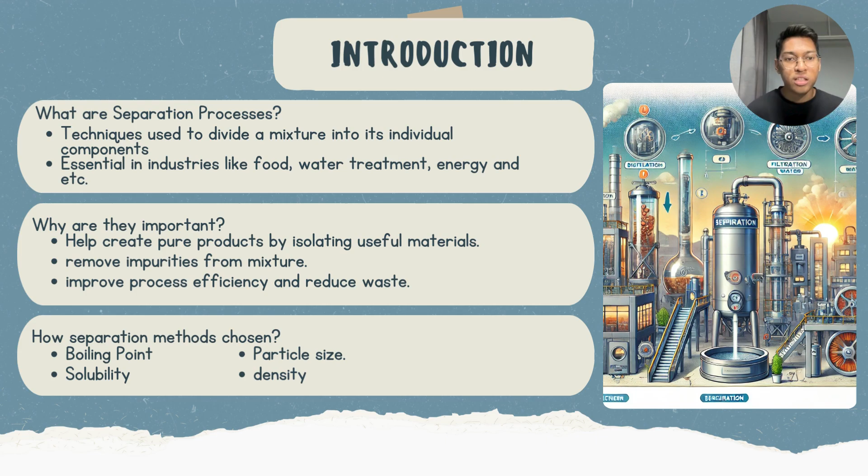So separation methods are chosen based on many parameters, and some of the parameters are boiling point, solubility, particle size, and density. So let us walk you through separation processes, especially the impact of separation processes and also its use in the industry on the environment.

Next is economic impact on separation processes. Their economic impact can be evaluated in terms of operational cost, capital investment, and resource efficiency. First is operational cost, energy consumption. Processes like distillation are highly energy intensive. Improving energy efficiency can have substantial economic benefits.

Labor cost. Automation in separation processes can reduce labor costs but requires an initial investment. Maintenance costs. Regular upkeep of equipment like filters or membranes impacts operational budgets. Next is capital investment. Advanced separation technologies such as reverse osmosis require high upfront costs, making them economically challenging for small-scale operation. Modular and scalable designs reduce initial costs, making technologies more accessible.

Lastly, resource efficiency. Raw materials utilization. To save money, efficient separation minimizes waste and optimizes resource use. Byproduct recovery. Some separation processes enable the recovery and sale of byproducts, boosting profitability.

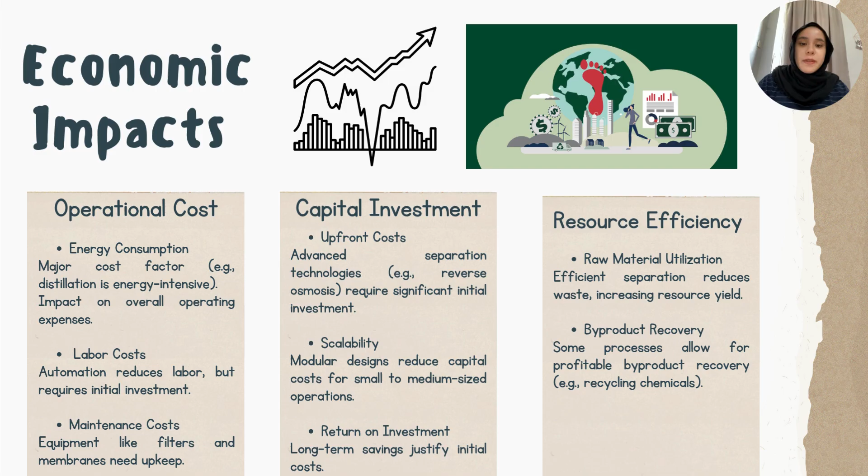Next is environmental impact on separation processes. Environmental impacts in separation processes can occur at various stages, from the raw material extraction to the disposal of waste byproducts. First is energy consumption. Separation processes such as distillation, filtration, or centrifugation can be energy intensive. For example, distillation requires high temperature, which may increase the carbon footprint of operations, particularly if the energy source is non-renewable.

Next is chemical usage. Many separation methods rely on chemicals, which can generate harmful waste. Solvents used in liquid-liquid extraction, for example, can be toxic, and improper disposal can contaminate soil and water.

Next is waste generation. The byproducts from separation processes such as spent solvents, solid waste, and air emissions may contribute to environmental pollution if not properly managed. The accumulation of waste in landfills or water bodies can lead to long-term ecological damage.

Lastly, water use and pollution. Separation processes often require large volumes of water for cooling, washing, or dissolving substances. This can contribute to water scarcity in some areas. Additionally, wastewater generated from separation processes may contain contaminants that can pollute local water resources.

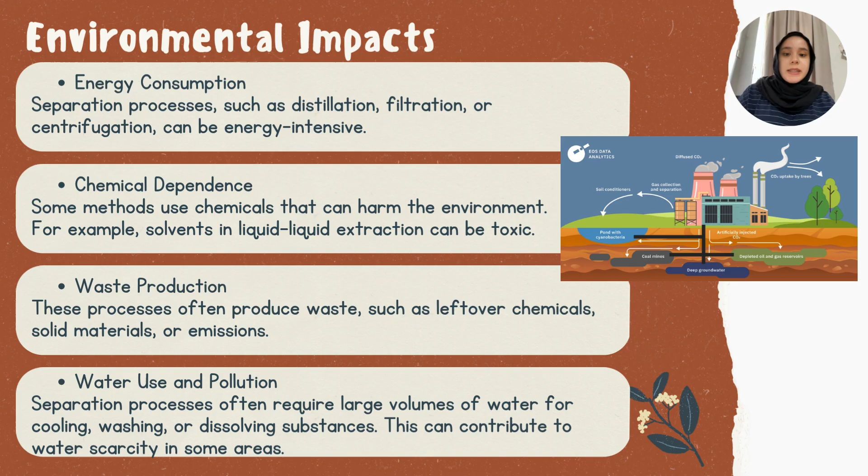And lastly, the impact of separation processes, which is social impacts. First, clean water for communities. Filtration and other separation methods provide safe and clean drinking water to the communities. These processes help prevent diseases and improve public health as well.

Secondly, affordable food and products. Efficient separation process techniques reduce production costs, making food, medicine, and consumer products more affordable. As for examples, refining sugar, purifying cooking oils, and processing dairy products.

And lastly, access to energy. Processes like distillation refine crude oil into fuels, and gas separation improves renewable energy systems like hydrogen production. This will provide energy for homes and transportation, as well as supporting daily life and economic growth.

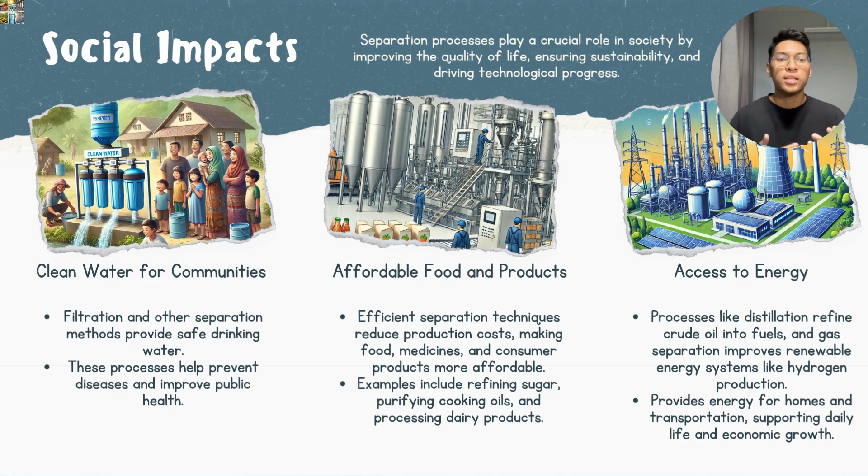Humidification is used to control the moisture level in industrial processes. It involves adding water vapor to air in order to regulate humidity in environments. An industry that applies the humidification process is the textile industry. The air humidification can increase productivity and product quality, especially the elasticity of the cotton and its tear resistance.

Besides that, it can minimize the electrical discharge from the materials being processed, where it prevents damage to the sensitive materials. Maintaining appropriate humidity levels improves air quality and ensures a comfortable working environment.

Next, humidification in food and beverage industries can ensure quality and freshness of the products, especially fruits and vegetables that are stored in cold and dry environments. Proper humidity can make the fruits and vegetables stay fresh and store longer.

The third initiative is the cooling tower in chemical and petrochemical industries. It is an evaporative heat exchanger with a lower operating cost, where the heat is transferred from water to air, then the water will evaporate and cool down by latent heat of vaporization, which then raises the air temperature and its relative humidity to 100%.

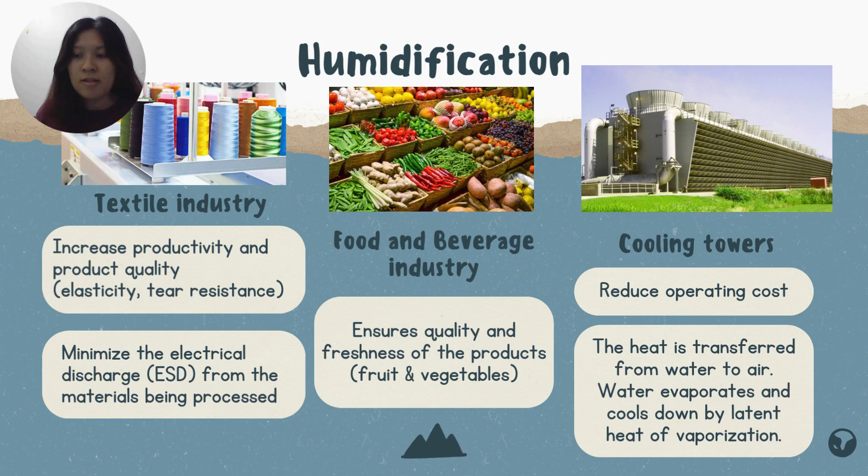Absorption is the process where a gas component is absorbed into a liquid phase, typically to remove undesirable gases, recover valuable components, or control emissions. The first initiative of the absorption process is flue gas desulfurization. Flue gas containing sulfur dioxide enters through a scrubber system.

Inside the system, the flue gas contacts a slurry reagent through spray nozzles and agitators. The limestone reacts with sulfur dioxide in the presence of water to form calcium sulphite and carbon dioxide. This process aims to reduce acid rain and improve air quality.

Next, for the carbon capture, amines and other solvents are commonly used to capture carbon dioxide from industrial emissions in order to mitigate climate change. Besides that, for air pollution control, the acid gas scrubber controls emissions of oxidizing halogenated compounds such as sulfur dioxide, which may form acid gases during the oxidation process in a thermal oxidizer.

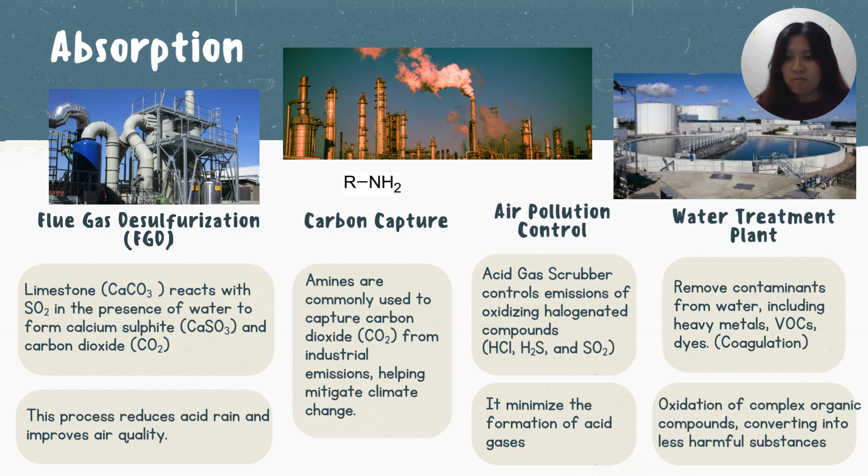And lastly, for the water treatment plant, absorption is widely used for removing contaminants from water, including heavy metals, volatile organic compounds, and dyes. Absorption can facilitate the oxidation of complex organic compounds into less harmful substances.

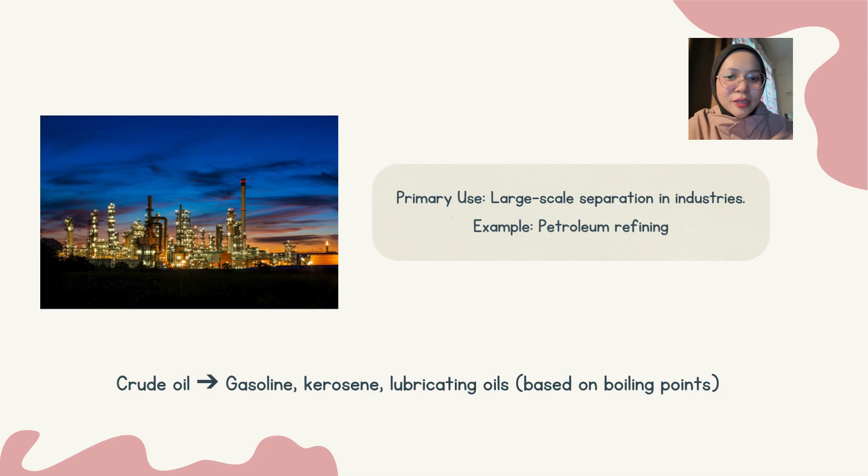So this is distillation. Distillation is a separation technique based on the boiling point difference of components in a liquid mixture. For example, producing pure water from dirty water. We usually use this distillation process in large-scale separation in industry, for example, petroleum refining. So we are starting from crude oil, gasoline, kerosene, lubricating oils.

As for the applications of the distillation process, we have water purification and oil refining. Water purification is used to purify the water by removing impurities and contaminants. This method is particularly beneficial in areas with poor water quality, ensuring the water is safe for consumption and use.

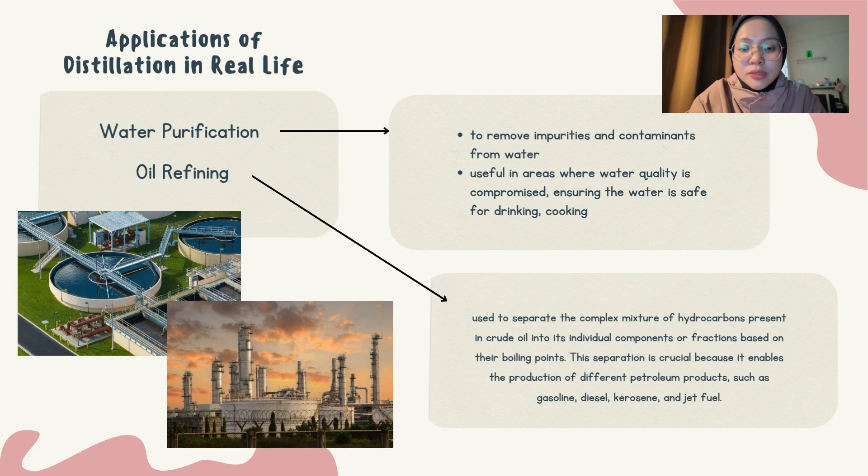And for oil refining, distillation separates the hydrocarbons in crude oil into distinct fractions based on their boiling points. This process is essential for producing various petroleum products like gasoline, diesel, kerosene, and jet fuel.

Now, I would like to talk about liquid-liquid extraction, or in short, LLE. LLE is a separation process where a solute is transferred from one liquid phase to another immiscible liquid phase based on their difference in solubility. The first application is pharmaceuticals, where LLE is extensively used to extract and purify active pharmaceutical ingredients, in short, APIs.

During drug formulation, crude mixtures from synthesis or natural sources often contain impurities. So LLE helps in isolating the desired compound by exploiting its solubility difference in immiscible liquids. Next is chemical processing. LLE is used to separate liquid-liquid mixtures in the chemical industry where simple distillation is impractical, such as when components have close boiling points or are heat sensitive. For example, recovering acetic acid from a dilute aqueous solution using an organic solvent like ethyl acetate.

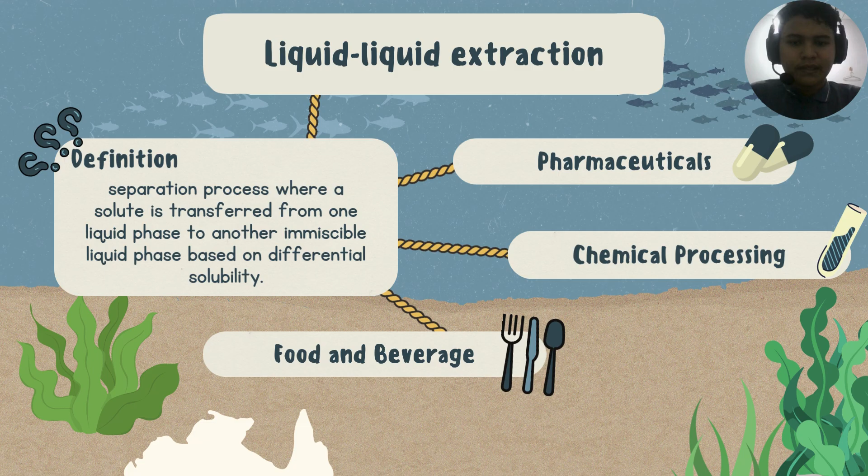Lastly is food and beverages. LLE is utilized to isolate flavors, essential oils, and aromatic compounds from natural sources. These compounds are used in the production of food additives, perfume, and beverages. So this is about LLE. Next, we will talk about SLE, which is solid-liquid extraction.

Okay, next is solid-liquid extraction, or in short, SLE. It is also known as leaching, and it involves separating components from a solid matrix by using a liquid solvent. The first example of its application is the extraction of copper oxide. This method uses an acidic solution, typically sulfuric acid, so that the copper ions will be dissolved into the acid. Then the leachate, which is the solution that contains the copper, will be further processed using solvent extraction to obtain pure copper.

Next is the extraction of gold. This method uses cyanide instead of acid. The cyanide acts as a solvent that dissolves gold particles from the gold ores. It forms a gold cyanide complex, which is soluble, and then the solution is processed to recover the pure gold using precipitation methods.

And lastly, the brewing of tea. In this method, we use hot water as our solvent. The hot water dissolves the soluble components from the tea leaves, such as caffeine or flavor, to form a solution. Then the insoluble component, which is the tea leaves, will remain in the machine. That is why we call this process solid-liquid extraction.

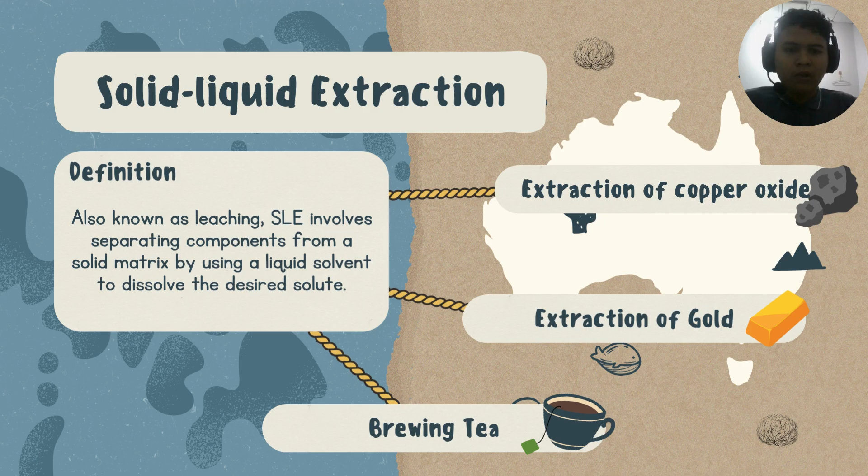Separation processes play a significant role across various industries, impacting economic, environmental, and social aspects. Processes such as humidification, absorption, distillation, liquid extraction, and solid-liquid extraction are essential for resource recovery, water treatment, air purification, and pharmaceutical production. All of them contribute to industrial efficiency, environmental sustainability, and the development of essential products.

The economic benefits of these processes are evident in cost reductions and resource optimization, while their environmental impact varies based on how they are applied. Overall, the effective use of separation processes helps balance industry growth with environmental responsibility.